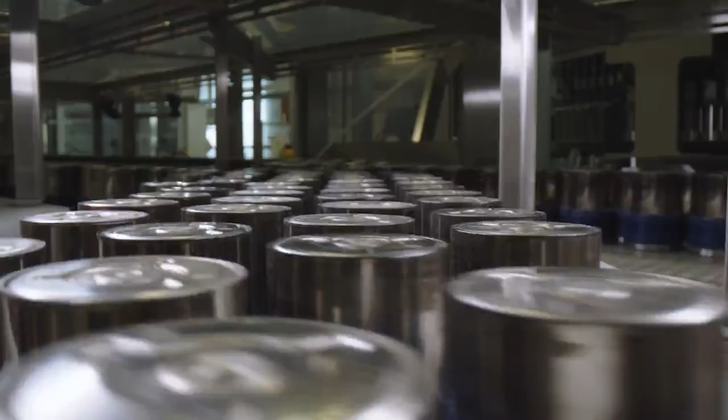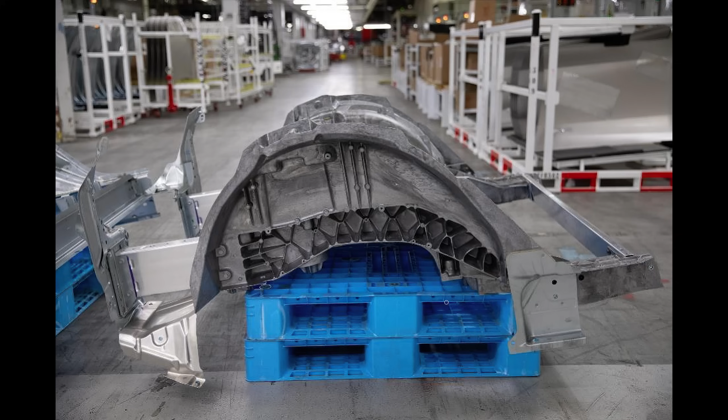As part of my gigacasting series, I hinted to the fact that magnesium castings would weigh 33% less than aluminum castings, and that magnesium is the lightest structural metal. If that's the case, why aren't companies like Tesla using magnesium gigacasting for vehicles instead of aluminum castings?

In short, it's because magnesium components historically faced a number of engineering challenges. In today's video, we'll look at how each of those challenges have been addressed in the last couple of decades, or will be addressed in the next few years by some of the biggest players in the industry, like IDRA.

As with the gigacasting series, this video kicks off a new series on magnesium, and it'll be followed by at least 3 other videos that explore the engineering solutions covered briefly today in much greater technical depth, along with their implications.

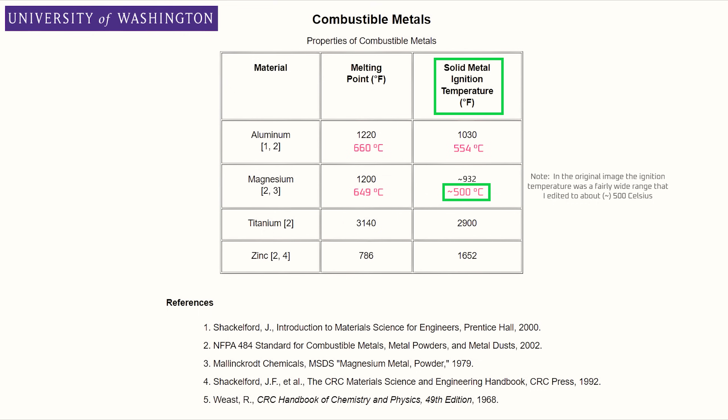Flammability is the first challenge for magnesium. Pure magnesium readily ignites at around 500 degrees Celsius, and that's often cited as a reason why large magnesium castings aren't viable for vehicles. But that thinking is reductionist, and there's a lot more to the story.

Let's start with the worst-case scenario: pure magnesium. Most people's first experience with magnesium was from high school science class, where the teacher might burn a strip of magnesium to show off its brilliant white flame. However, when magnesium is used in products, you're looking at a much larger piece of magnesium, and it's almost never pure magnesium. A larger piece of magnesium takes much more energy to heat, and magnesium also has high thermal conductivity, which allows it to dissipate heat rapidly.

Thanks to this clip by Magrathea for today's video, we can see that it takes minutes or longer rather than seconds to ignite an ingot of magnesium. What's happening here is that the magnesium ingot is absorbing a lot of energy and it's heating up, but the energy input from the flame is being balanced by heat conduction away from the flame.

That heat dissipation effect is so strong that with the amount of heat being applied here, the ingot may actually never ignite. What this means is that even if pure magnesium was used in a vehicle, it wouldn't be a risk for triggering vehicle fires, and it's far safer than substances that are already used in vehicles like oil or gasoline that are triggers for vehicle fires.

Note that I said to trigger the vehicle fire. Extinguishing a vehicle fire is another story. More on that in a moment.

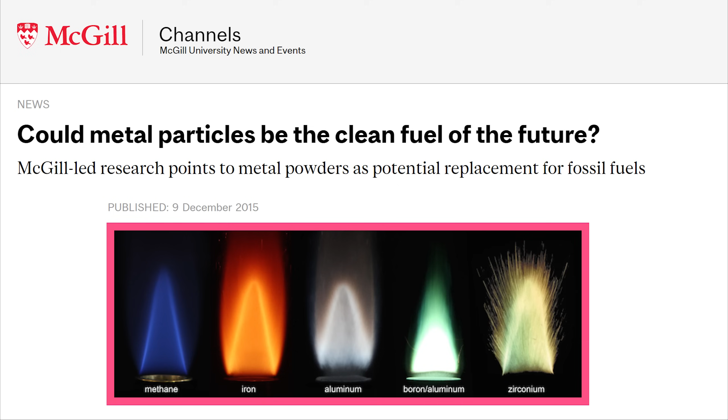As a side note, one thing that's often missed when discussing the flammability of magnesium is that other metals such as iron and aluminum can also ignite in the right conditions, such as when they're in powder form, molten, or exposed to oxygen. So although magnesium is more flammable than iron and aluminum, the fact that it is flammable doesn't make it unique among structural metals. It's just that the risk of flammability is higher. But again, it's far less flammable than most of the other materials used in a vehicle.

Now that we've looked at pure magnesium, let's take a look at the impact of alloys on flammability. The magnesium alloys commonly used in consumer products have a better balance of properties than pure metal. One of those properties is fire resistance. Alloys starting with the codes AZ, AM, AS, and AE are commonly used in automotive parts.

They have ignition temperatures that are about 50 to 100 degrees Celsius higher than pure magnesium, and as we'll see in a moment, they burn less intensely.

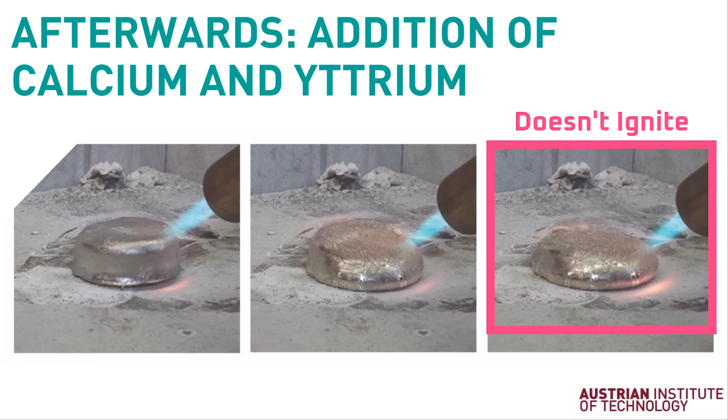More recent advances in fire-resistant alloys from the Austrian Institute of Technology, or AIT, show that the addition of calcium and yttrium allow magnesium to be heated to its molten state and it doesn't ignite. That was confirmed in testing by the Federal Aviation Administration, and the alloy has been approved for use in jets.

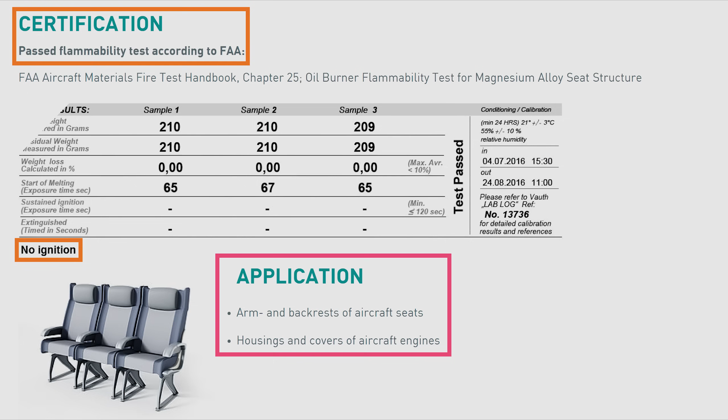It's not clear how much calcium and yttrium AIT used to achieve that result, but their patent application indicates that it's likely between 0 to 1% calcium and 0.05 to 0.6% yttrium, so the dopants only made up a fraction of the alloy.

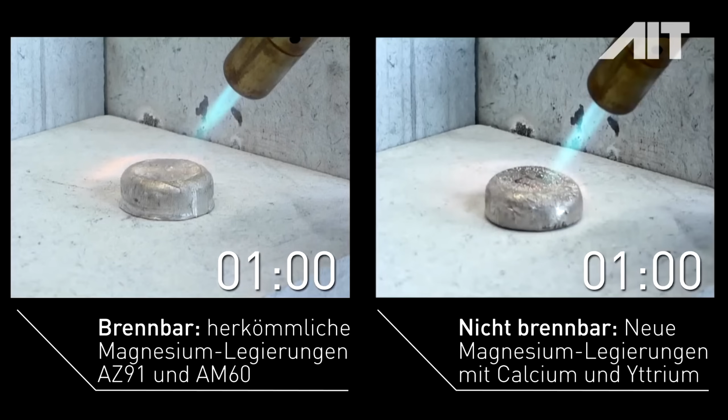Let's look at a video of how it performs versus more common alloys. On screen is a video from AIT comparing magnesium alloys such as AZ91 and AM60 with the calcium and yttrium alloy. Bear in mind that they've used small pieces of magnesium for demonstration purposes to accelerate the speed that melting and ignition occur. After about 1.5 minutes, they both melt.

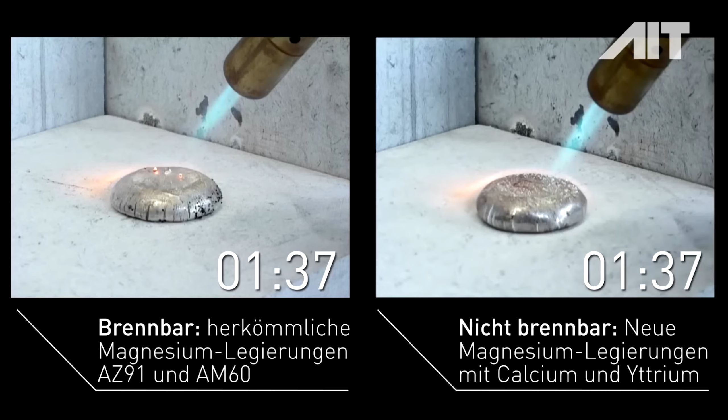However, whereas the AZ91 and AM60 alloy goes into thermal runaway and slowly catches on fire, the AIT alloy remains in its molten state and doesn't catch on fire. This shows that common alloys have better thermal performance when exposed to flame than pure magnesium, but calcium and yttrium can be used if more robust fireproofing is needed.

That might be useful in the future when more magnesium is used in vehicles. That's because magnesium fires react violently to water, and the amount of magnesium already used in vehicles is a safety concern for firefighters. With that said, the challenge needs to be put in perspective. Firefighters are familiar with putting out magnesium fires in vehicles because it's been used by the automotive industry for about 100 years already.

That's as opposed to battery fires, which arguably pose a greater challenge for firefighters. Why? First, battery fires are self-sustaining electrochemical fires that can reignite weeks after the fire is presumed out. Second, there's usually about a quarter ton of battery cells in an EV, encased in a metallic enclosure deep in the core of the vehicle, making them difficult to access and extinguish, and they can take days to cool off. Third, they generate toxic fumes such as hydrogen fluoride.

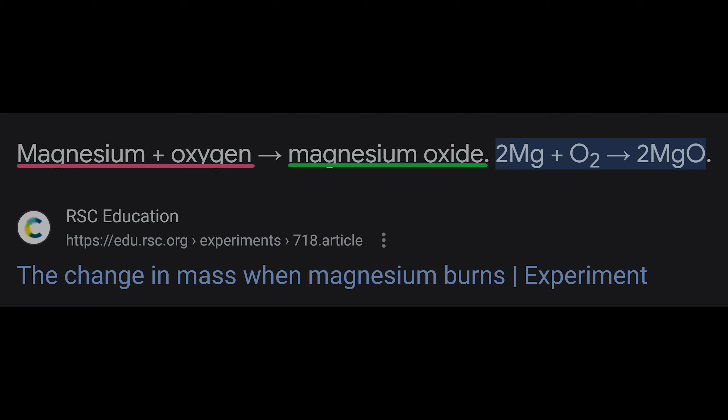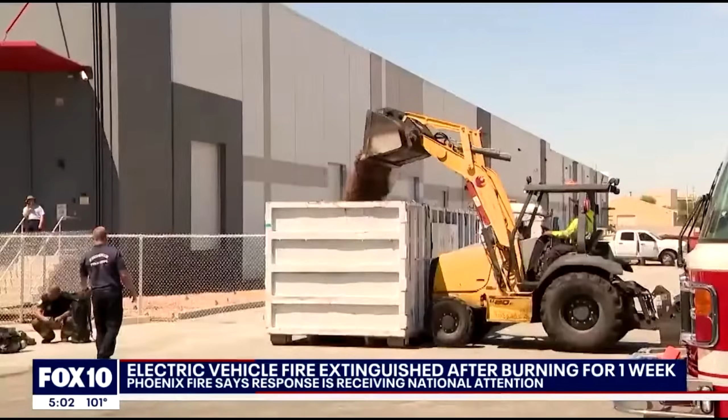That's as opposed to magnesium, which reacts with oxygen to form magnesium oxide, which the body can process. So the main concern would be all the other materials burning in the vehicle fire, like paint, plastic, and other metals like aluminum. Fire departments are adapting by using fire blankets to help control and extinguish fires, and burying the cars in sand for a week to prevent reignition risks.

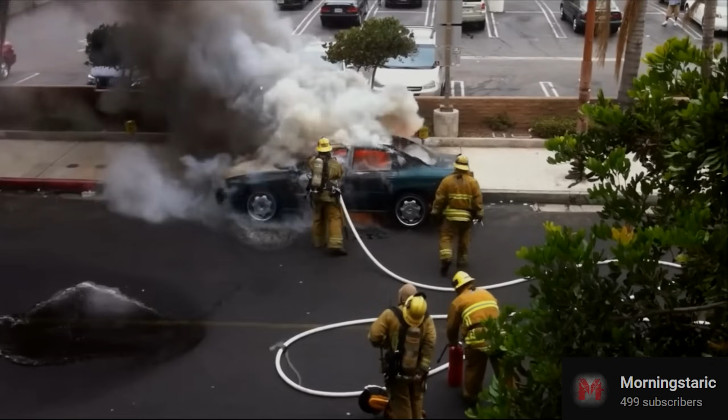Interestingly, the same or similar strategies used for battery fires will also work on magnesium fires, but that's a topic for another video. Overall, the key message here is that magnesium won't trigger a vehicle fire. And although a vehicle fire involving magnesium is more difficult to put out than a regular vehicle fire, it may actually be a smaller concern for firefighters than the battery pack. That is, the flammability of magnesium is commonly put forward as the reason it isn't used more heavily in vehicles, but that's not the technical reality.

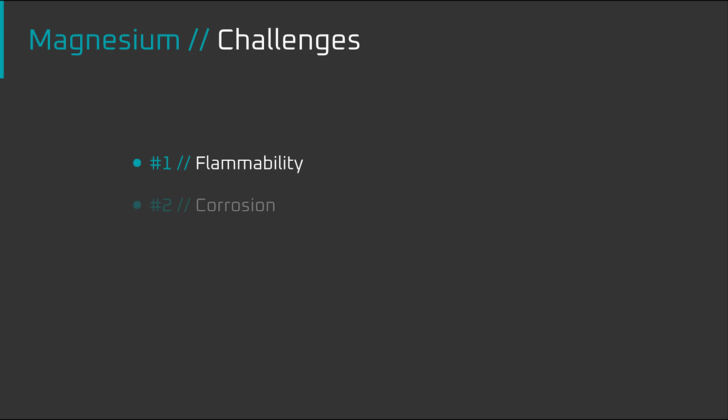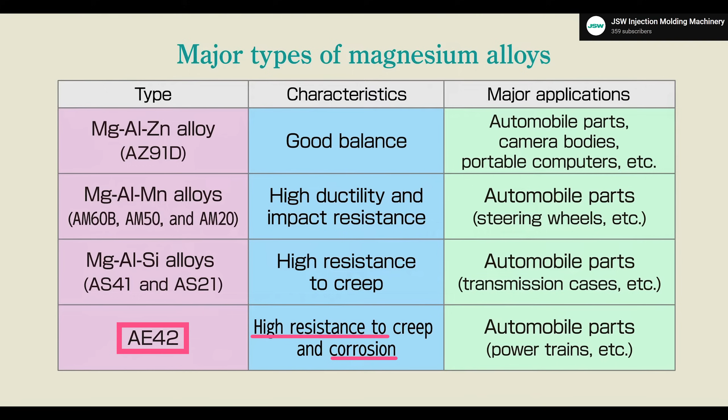Let's move on to the next challenge with magnesium, which is that it's highly susceptible to corrosion from chemicals like sodium chloride. Once again, while corrosion makes pure magnesium fundamentally unviable, with the right alloys and surface treatments, magnesium fares well against corrosion, and there's a lot of work being done to improve that even further.

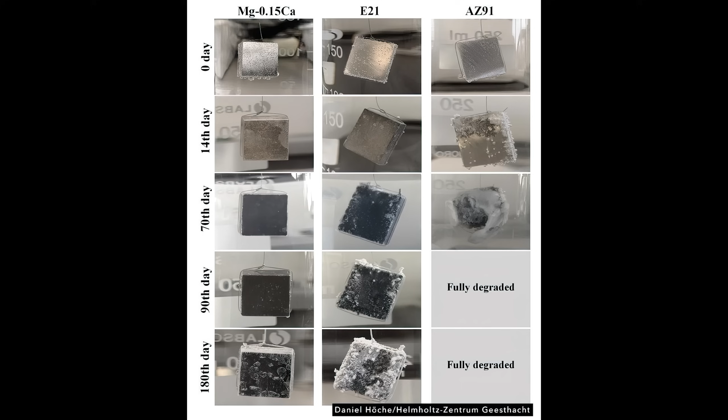For example, in 2021, researchers from the Helmholtz Center for Materials and Coastal Research reported a new magnesium alloy so corrosion resistant they called it stainless magnesium. On screen are images from that research where three alloys were exposed to extreme corrosion conditions. On the far right is a common AZ91 magnesium alloy, which in newer blends tends to have good corrosion resistance similar to aluminum. In the center is an E21 magnesium alloy with great corrosion resistance. And on the far left is a new alloy using only 0.15% calcium that has excellent corrosion resistance.

After 6 months in a solution of 3.5% sodium chloride, the AZ91 is fully degraded. The E21 is showing pitting and surface corrosion, and the new 0.15% calcium alloy is just starting to show some surface corrosion. How does that work?

The researchers claim that for the stainless magnesium, the calcium creates a protective surface film and stabilizes impurities within the alloy to reduce the corrosive effects of the sodium chloride solution. And because the calcium is used in such small amounts, it's able to do that while maintaining the properties of pure magnesium. Just like we saw with flammability, there are alloys available to mitigate the corrosion challenges with magnesium.

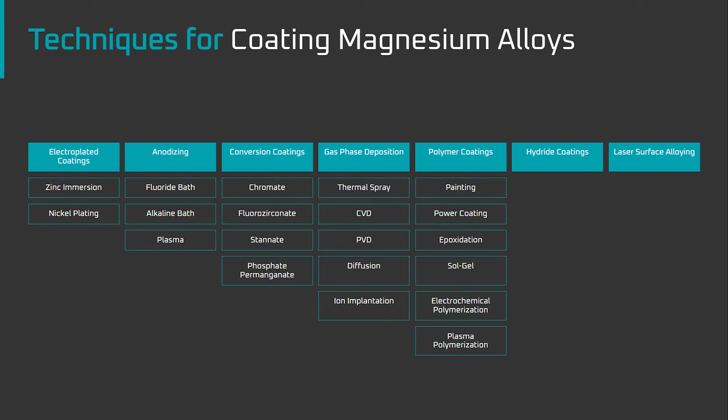It's also worth noting that besides corrosion-resistant alloys, magnesium parts can also be coated in a number of ways to further increase corrosion resistance. So if there is a use case that requires even better performance, there are solutions available. Before we move on, it's worth making two more notes on alloys. First, over the past several decades, dozens of magnesium alloys have been developed that offer not just corrosion and fire resistance, but also a range of strength and ductility characteristics.

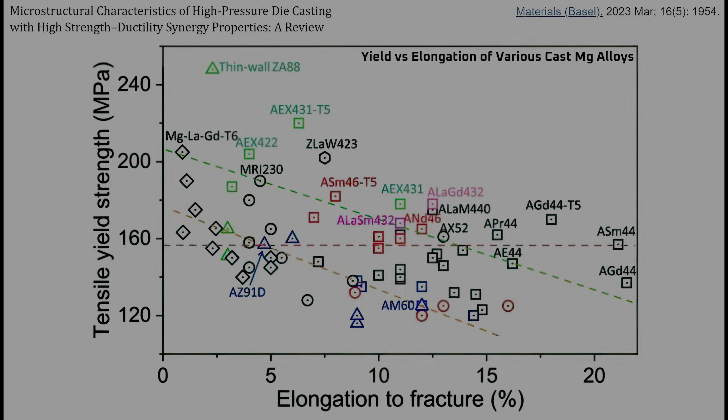Thanks to that, magnesium is already being used for, or considered for, a number of automotive components. That is, for the most part, the range of performance characteristics offered by magnesium alloys already make magnesium the preferred metal for a number of use cases. So what's actually holding magnesium back? We'll take a look at that in a moment.

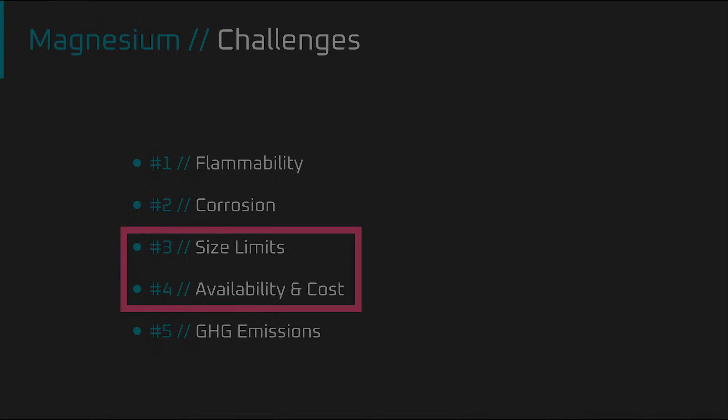As a side note, I'm focused on automotive use cases today, and that'll continue throughout the series because that's where I see the biggest and most exciting opportunities for magnesium in the coming years.

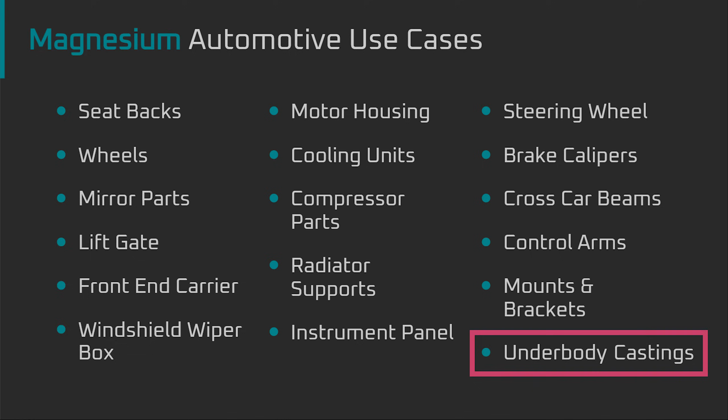The second note on alloys is that even if there is a use case that magnesium alloys haven't been developed for yet, more alloys can always be developed. As I showed in my gigacasting alloy video, Tesla's gigacasting process was a new use case with new requirements, so they developed a new alloy. The link for that video is in the card above.

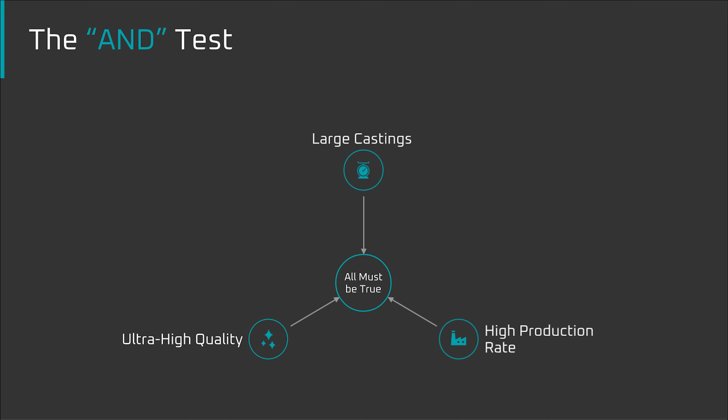Next, let's move on to size limits. In the past, it was possible to make large magnesium castings, to make magnesium castings at a high production rate, and to make ultra-high quality magnesium castings, but not all three at the same time.

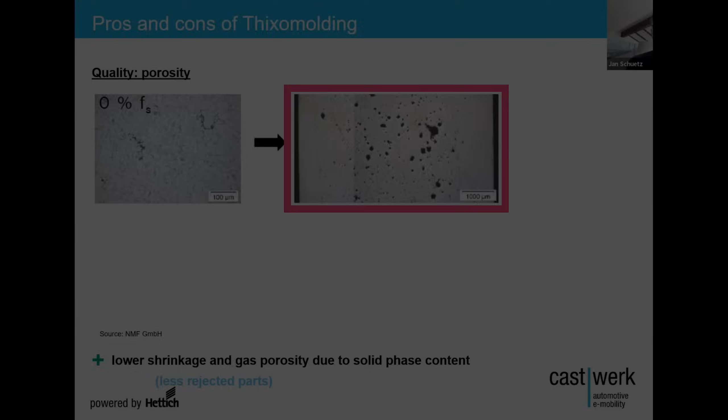Typical molten metal cold chamber die casting can create large castings at a fast rate, but those parts tend to have high porosity, meaning they're lower quality than what other methods can produce. But the magnesium casting industry is about to change.

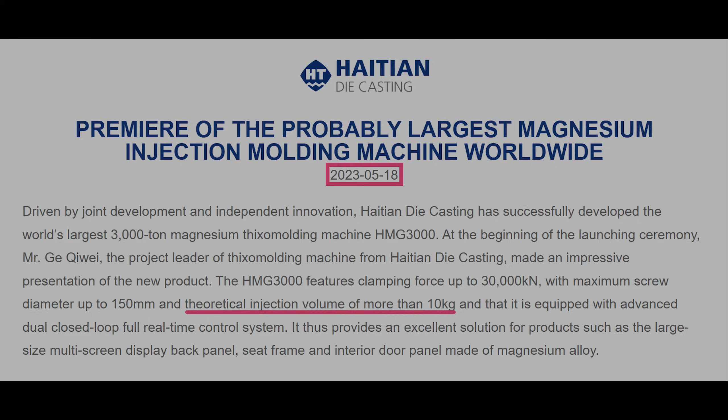Idra, which was the first supplier for Tesla's gigacasting machines, recently gave a talk where they shared a roadmap for 2025 for magnesium chip casting, indicating they intend to produce gigaplast machines that can support shot weights for magnesium castings of up to 20 kilograms. The best information I can find indicates these types of machines were previously limited to shot weights of around 10 kilograms, but even that is a recent development from earlier this year, and most machines until a few years ago were limited to less than 5 kilograms.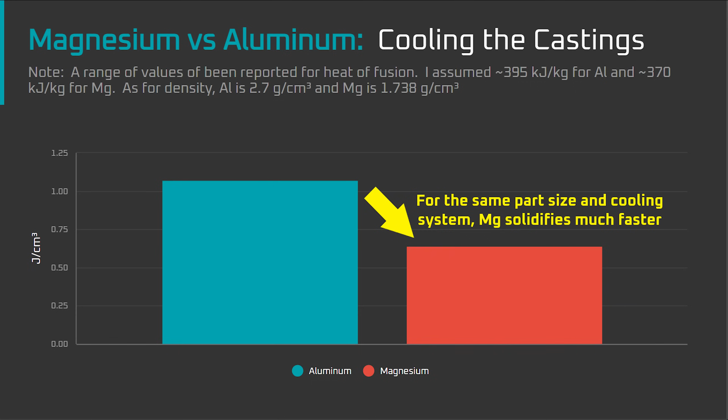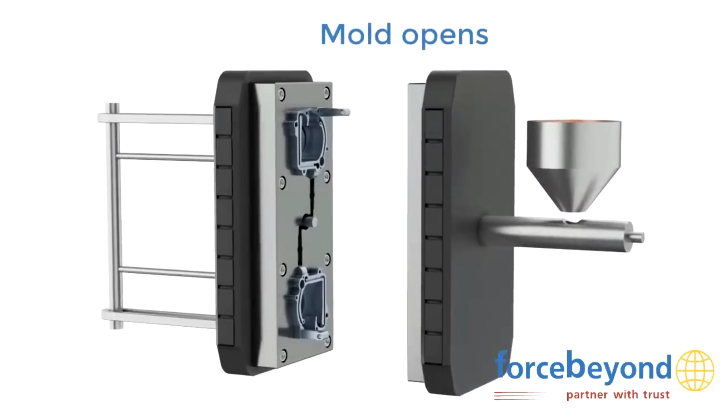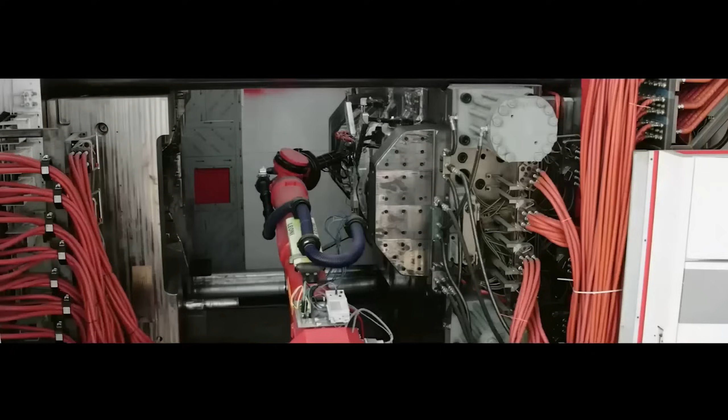The question is, are the gigaplast machines able to produce those large castings at high speed and ultra-high quality? In short, yes. First, with regards to production rate, magnesium has a lower heat of fusion and is less dense than aluminum, meaning for the same cooling power and volume of material, magnesium solidifies more quickly. Additionally, molten magnesium is less reactive with the die, so cast magnesium parts aren't as prone to sticking and can be removed easily, as opposed to aluminum, which tends to chemically attack and stick to the die, making it more difficult to remove castings. The combination of those two things means cycle time for magnesium castings tends to be faster than for aluminum castings. So at a first principles level, speed won't be an issue for Idra's magnesium chip casting machines.

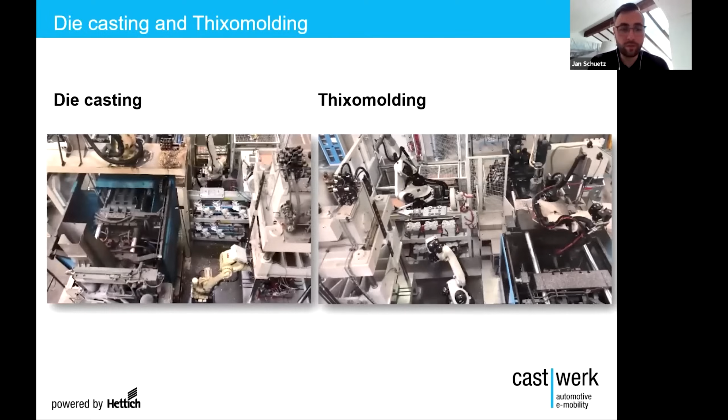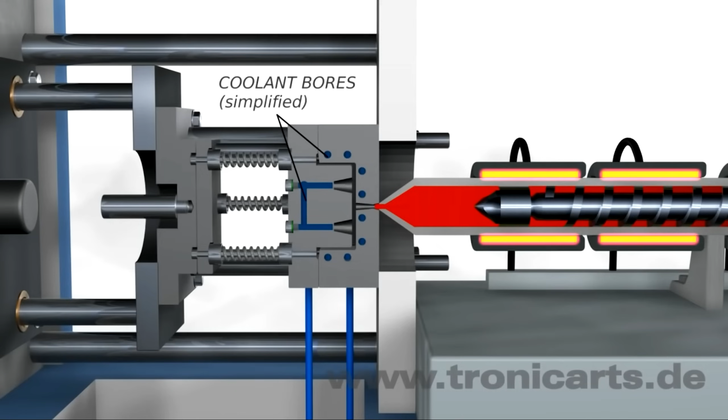Second, what about quality? The chip casting that Idra refers to is a thixomolding process, where magnesium chips are fed into an auger surrounded by heating elements that warm the chips until they're semi-solid, like the consistency of soft butter, before being injected into the die chamber. That butter-like consistency means there's no turbulence like there is with fully molten metal used for aluminum casting, which means fewer voids in the material, and in turn higher part quality and consistency. Why does that matter?

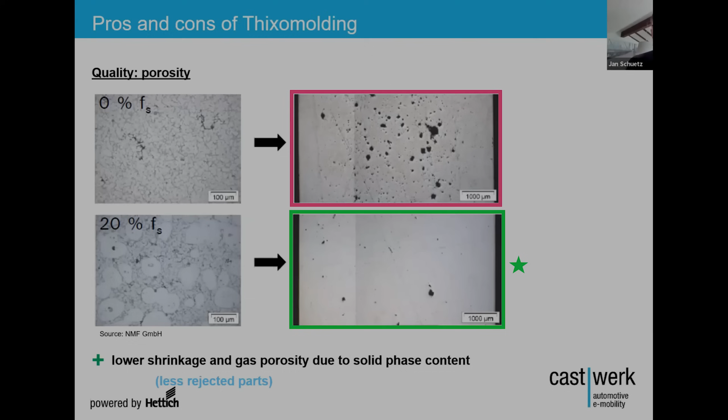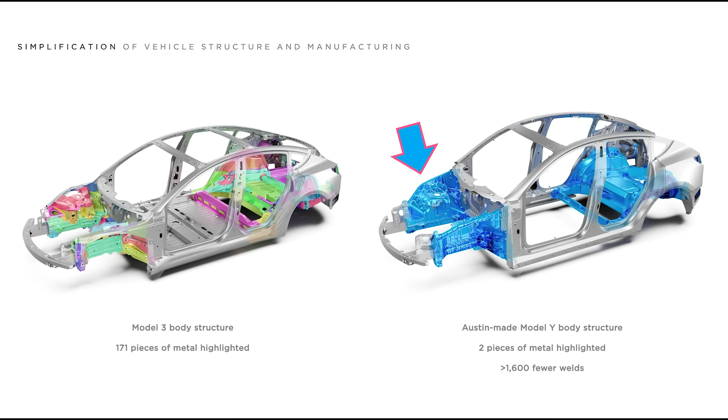As Sandy Munro said in a recent video, thixo-molded parts bring the performance of cast parts closer to the performance of a forged part, meaning lighter and stronger parts. That, in turn, means magnesium will become much more competitive with cast aluminum parts as a structural component within the vehicle. Thixo-molded magnesium may even open the door to massive magnesium underbody castings that may replace their aluminum counterparts, which could remove tens of kilograms of mass from vehicles while creating a better overall driving experience. I'll get deeper into that in the next video.

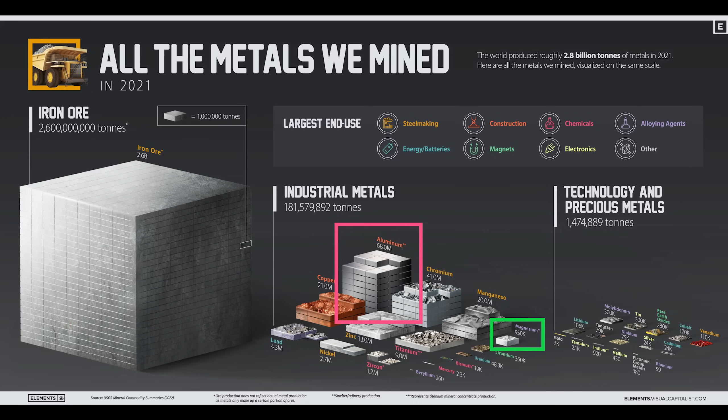Next, availability and cost are closely related, so I'll cover them at the same time. I'll start with availability because it drives cost. This image shows that roughly 950,000 tons of magnesium were produced in 2021, which is small compared to its closest functional competitor, aluminum, which saw 68 million tons of production in 2021.

Why is magnesium produced in such low volumes? Is there a resource constraint here? The answer is no. Like aluminum, magnesium is an abundant rock-forming element. In fact, when I looked up the U.S. Geological Survey data on magnesium, it's so plentiful that they don't even bother listing reserves, but rather just say the reserves are sufficient for any potential future needs.

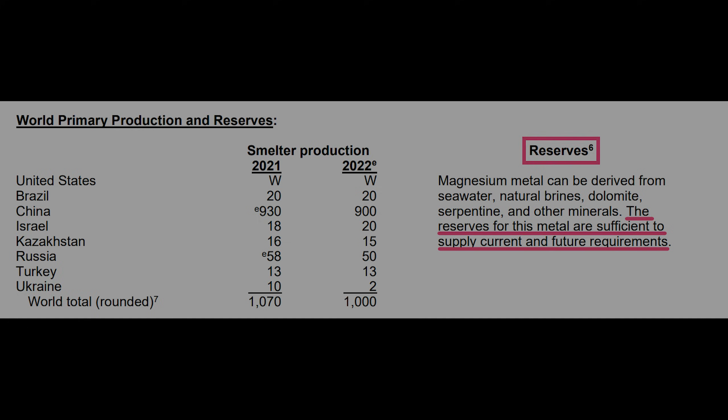If it's not a resource issue, is it an extraction issue? At a fundamental level, no. There have been ways to extract magnesium since the 1800s, but it wasn't until World War I that high-productivity, modern processes began being developed, and not until World War II that a forcing function was created to scale production. That should give a hint as to why magnesium is produced in such low volumes. Its closest competitor, aluminum, had a head start.

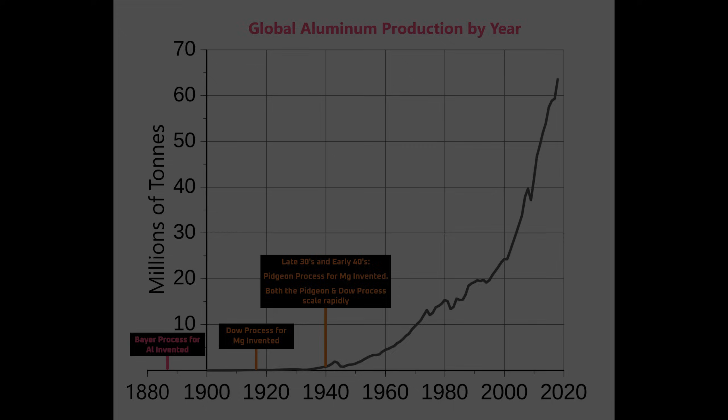In the late 1880s, the modern process for producing aluminum, the Bayer process, was invented. So depending on how you look at it, aluminum was able to start building significant industrial scale 20 to 50 years earlier than magnesium. That means aluminum production and the development of aluminum alloys had a lot more investment dumped into them at an earlier date, meaning larger scale, lower costs, and better performance at earlier points in time. That created a competitive headwind for magnesium. With that in mind, it's clear why the magnesium market is 1/60th the size of the aluminum market.

Moving along, the small scale of the magnesium market means it's much more expensive than it should be, and also means there's not much depth to the market, which in turn means supply and price instability. That makes magnesium a hard sell because it's cheaper and less risky for companies to just use aluminum. However, I expect that to change as both the cost and benefit sides of the equation improve for magnesium.

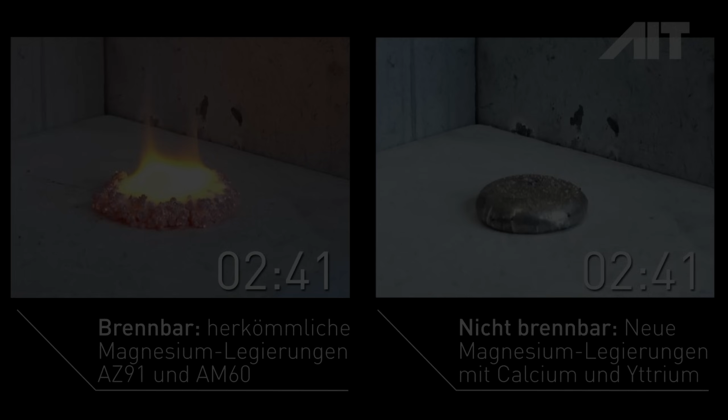As I pointed out earlier in the video, the benefit side of the equation is improving as magnesium's drawbacks have been and are being addressed through chemistry and engineering. That means, independent of any other variables, demand for magnesium will increase because it will be increasingly viable for more use cases.

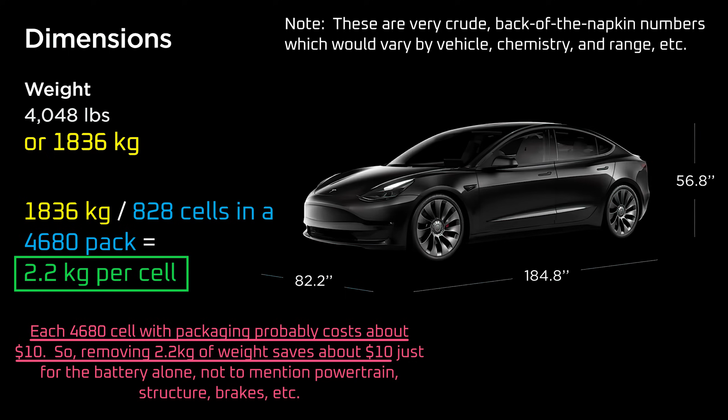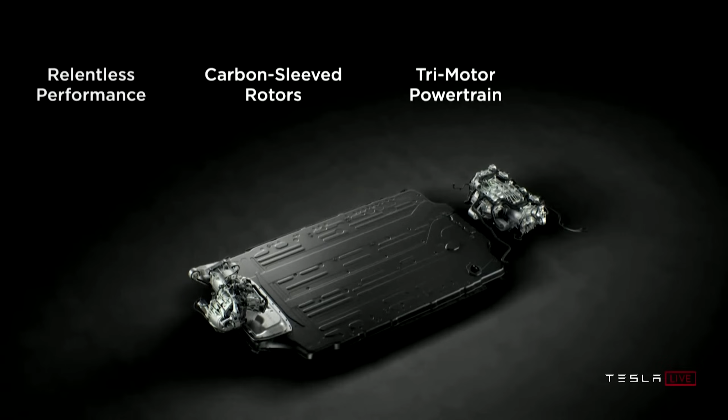While we're on the topic of demand, there's another tailwind for magnesium: electric vehicles. Using rough back-of-the-napkin math, for every 2.2 kilograms of weight removed from an EV, about one 4680 sized battery cell plus its packaging can be removed. Each of those cells probably costs about $10 with packaging, and that's just for the battery. The lighter battery pack would also save money in the suspension, motor and inverter power, brakes, and structural reinforcement needed to carry the battery weight.

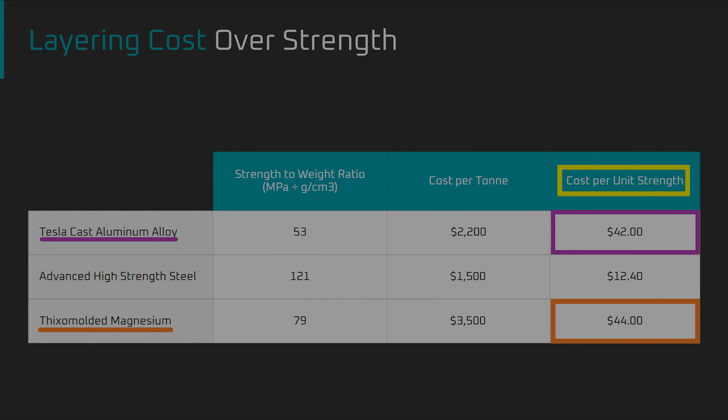That means even with a slight cost premium at the material level, magnesium can reduce total vehicle cost. So even if there were no advancements in magnesium alloys or manufacturing processes for the rest of the decade, we're still going to see demand for magnesium increase, because the economics of EVs are creating a forcing function for lighter materials, even if those materials are more expensive.

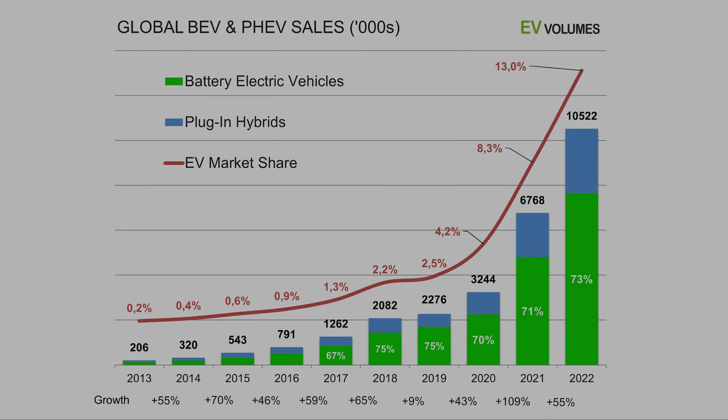That increased demand will drive investment, which will drive innovation, development, and scaling, which in turn will increase supply, bringing us to the cost side of the cost-benefit equation. We're already seeing companies poised to tackle the supply, price, and price stability challenge, like Magrathea. Magrathea in particular is working on a process that'll produce magnesium with an unparalleled environmental profile compared to any other structural metal.

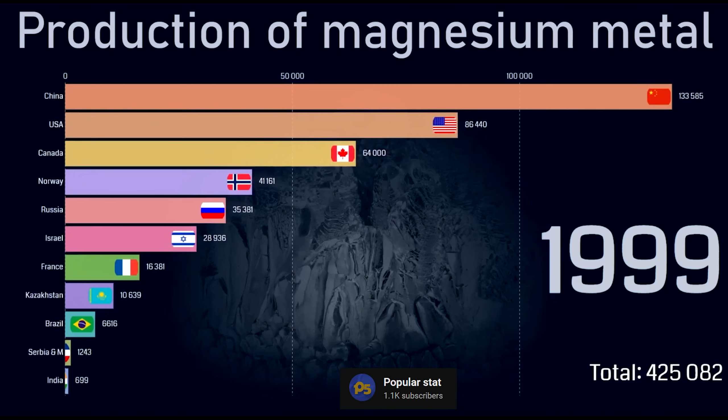That leads us to the final challenge with magnesium. In terms of production, in the past few decades, it's had a poor environmental profile. That's because magnesium has mostly been produced in China since the 1990s using environmentally disruptive processes primarily fed by coal power. Magrathea is working on a process to extract magnesium from seawater.

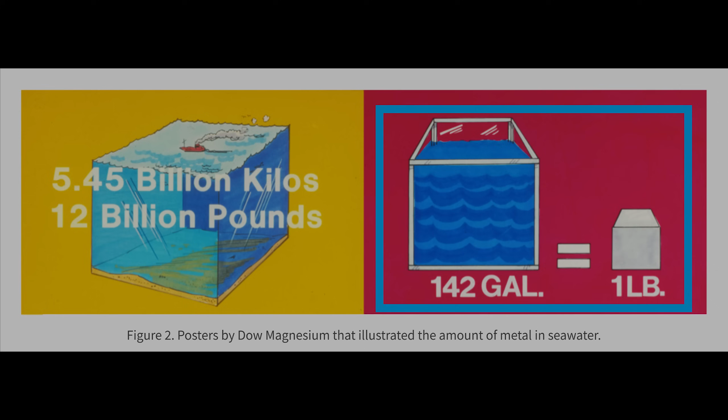If that sounds far-fetched, bear in mind that seawater contains about 1 pound of magnesium per 142 gallons, or 0.85 kilograms per cubic meter. Also, as I showed on screen earlier, Dow Chemical started extracting magnesium from seawater in the 30s and 40s, and continued to do that profitably until the 1990s when China entered the market. We're not talking science fiction here, but resurrecting and improving an old technology that wasn't just profitable for Dow, but also Norsk Hydro.

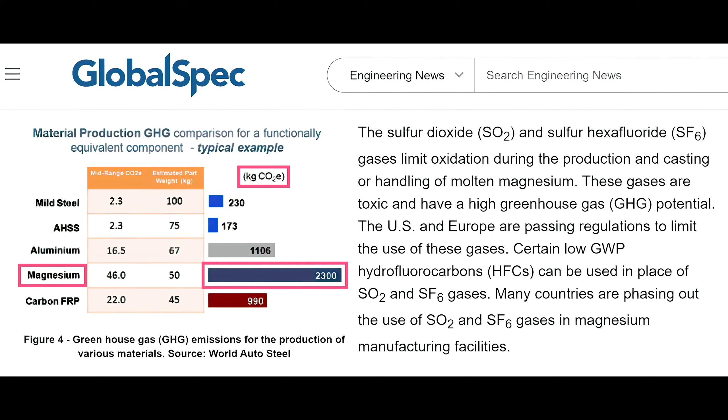What this means is that even if the metal Magrathea produces is a similar cost to the rest of the magnesium on the market, it'll still be much more desirable than the magnesium produced in China, because one of the primary metrics for EV makers is lifetime CO2 emissions.

But if Magrathea can not only reach cost parity with conventionally produced magnesium, but produce it more cheaply, which is their goal, they could see huge demand, and they quite literally have an ocean of material to tap into for effectively unlimited scaling.

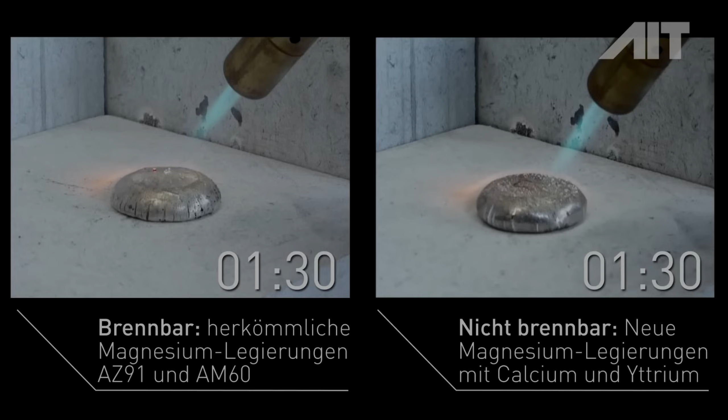In summary, in the past there have been legitimate challenges that stood in the way of magnesium becoming a material embraced by the automotive industry, and many others. The flammability of magnesium is, or was, a challenge, but the attention it still receives is disproportionate. Magnesium, and especially its alloys, are less flammable than most materials in a vehicle, particularly fuel and batteries, and there are even aircraft-grade alloys that don't ignite.

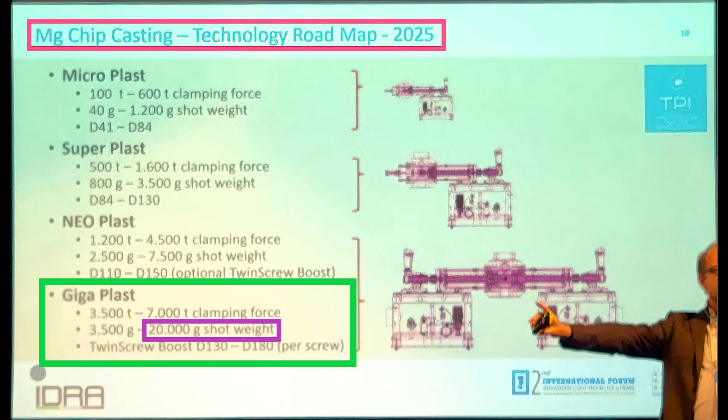Corrosion was already solved for many use cases, but now there's stainless magnesium for extreme use cases. As for size limits, with IDRA's new Giga Plast machines, the industry is moving towards large castings produced at a high rate that are also high quality, meaning low porosity cast parts that are stronger and behave more like forged parts. Availability and cost are being tackled by Magrathea, tapping into an ocean of supply while producing magnesium that, unlike the magnesium produced in China, will be inherently carbon neutral.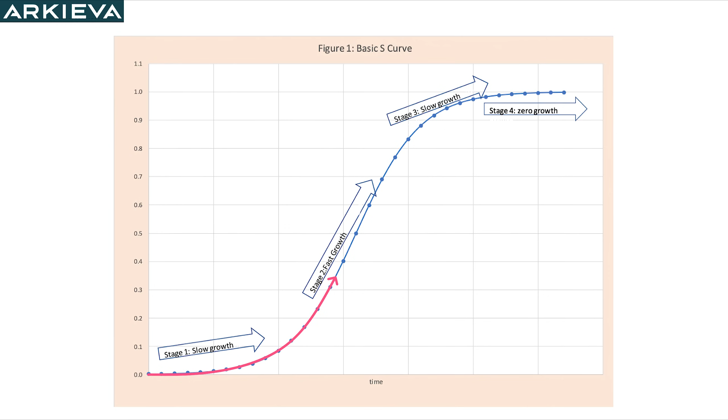With that in mind, my view is that we're going to see an S-curve over the next 5 to 10 years where magnesium starts to displace aluminum as the dominant structural metal for lightweighting and simplifying vehicles and other mass-sensitive applications. In the next video of the magnesium series, I'll walk you through IDRA's plans for thixo-molded magnesium, and after that we'll look at Magrathea's plans to resurrect the extraction of magnesium from seawater.